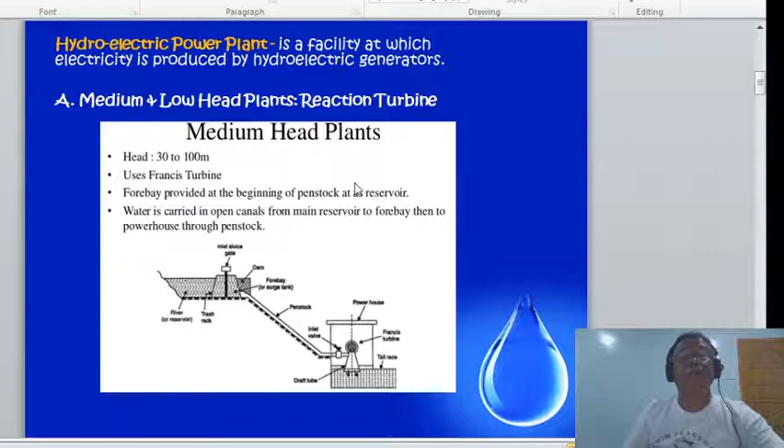Okay, so forebay provided at the beginning of penstock at the reservoir. Okay, so water is carried in open canals from main reservoir to forebay, then powerhouse through penstock. Okay, so here, class, is the illustration of the medium head plants. Okay,

so another, we have here the high head plants. So the turbine used for high head plants is the impulse turbine. Okay, so the head is from 100 meters to 2,000 meters. So water is stored in the lake over the mountain during high rainy season or when snow melts. Okay, so the turbine of course is the Pelton wheel. Okay, so this is the type of turbine that is utilized for high head plant.

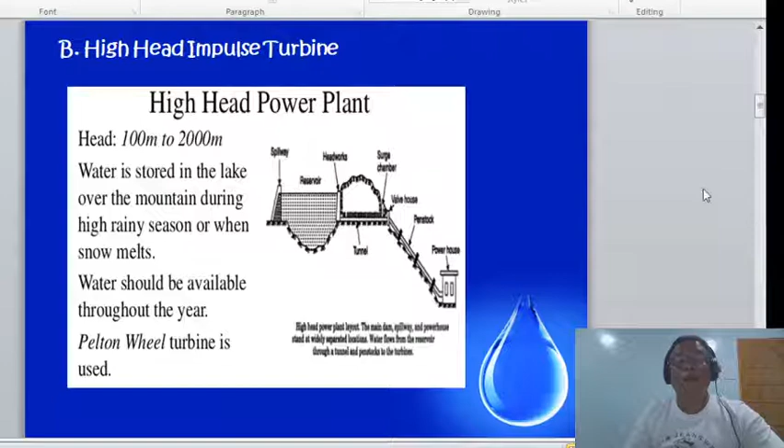Okay, so we have here some definitions of the hydroelectric power plant. One is of course the reservoir. Okay, so it stores the water coming from the upper river or water falls. Another is the headwater. So this is the water in the reservoir, the level of the water in the reservoir. Okay, spillway. So it is a weir in the reservoir which discharges excess water, so that the head of the plant will be maintained. Okay, another is the dam. So concrete structure that encloses the reservoir.

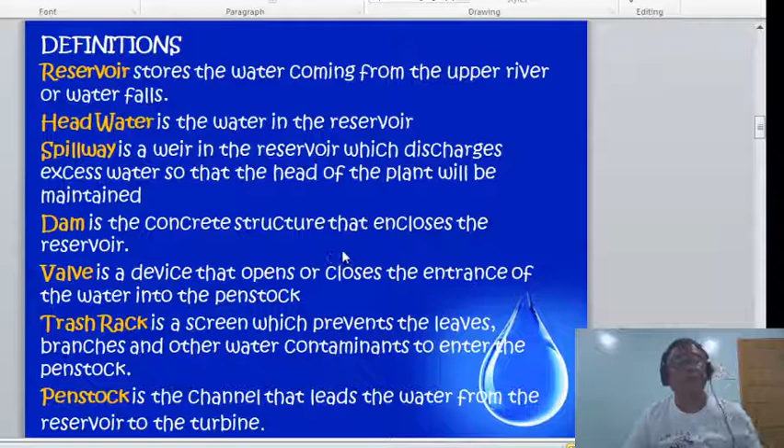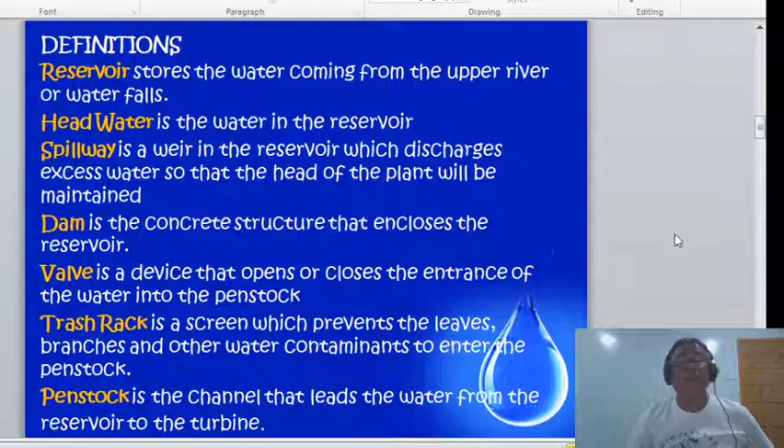Okay, valve. Okay, this is a device that opens and/or closes the entrance of the water into the penstock. Okay, another is trash rack. So it's a screen which prevents the leaves, branches, or other water contaminants to enter the penstock. So another is the penstock, of course, this is the channel that leads the water from the reservoir to the turbine. Okay, so take note, class, of the definitions.

Okay, so another, we have also surge chamber. Okay, so it's a standpipe connected to the atmosphere and attached to the penstock, so that the water will be at atmospheric pressure. Okay, we have generator, tail race. Okay, tail race is a channel which leads the water from the turbine to the tail water. Okay, and another is the draft tube. So a device that connects the turbine outlet to the tail water so that the turbine can be set above the tail water level. Okay,

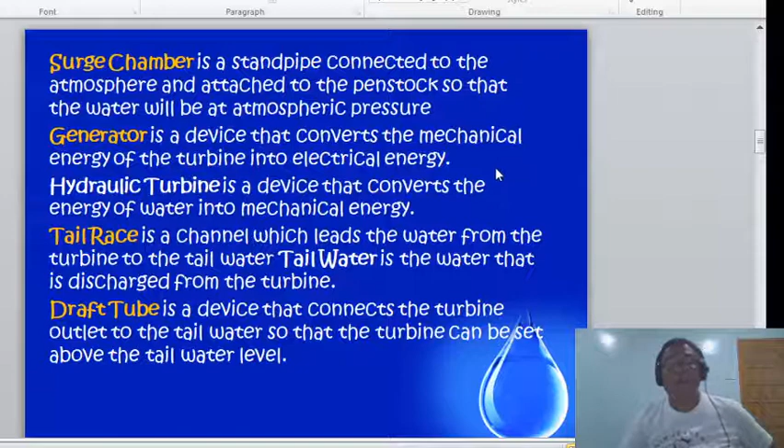so let us now go to the performance of hydroelectric power plants. Okay, so first we are going to determine what is a gross head. Okay, so gross head is the difference between the headwater and the tail water elevation. Okay, so HG is equal to headwater minus the tail water. Okay, so another, we have here the friction head loss. Okay, so we have here two formulas that can be useful in computing the friction head. Okay, so friction head loss is the head lost by the flow in a stream or conduit due to the frictional disturbances set up by the moving fluid and its containing conduit and by intermolecular friction.

Okay, so we have here the first is using the Darcy-Weisbach equation. Okay, wherein the formula is easy. So that is fLv² over 2gD. Okay? And another, we have the Morse equation. So, the formula is quite similar. Okay? So, in the Morse equation, the 2 is now at the numerator. Okay? From the denominator to the numerator. But take note, class, that when you use this equation, Morse equation, you have to use the friction constant, or f, from the Morse table. Okay? So take note of that, class. Okay?

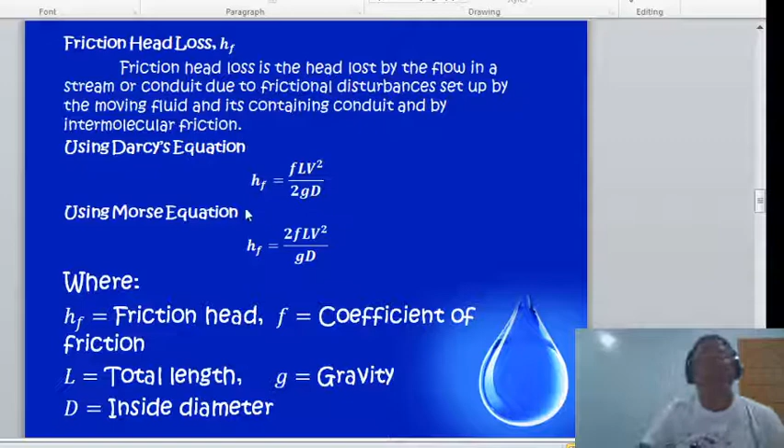So another is the net head. Okay? So the net head is, of course, the effective head, or is the difference between the gross head and the friction head loss. Okay? So the net head is gross minus HF. Another is the penstock efficiency. Okay, so we have here the net head divided by the gross head. Okay, so volume flow rate of water. So this is the product of the velocity and the cross-sectional area. Okay, so that is Q is equal to cross-sectional area of the conduit, or the penstock, multiplied by its velocity, is now your discharge.

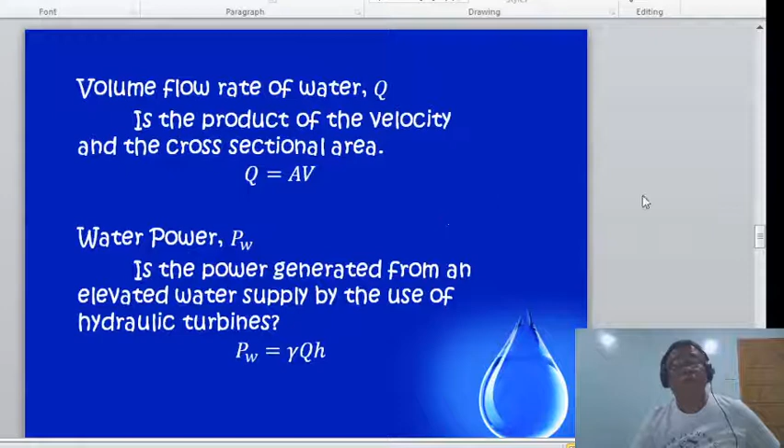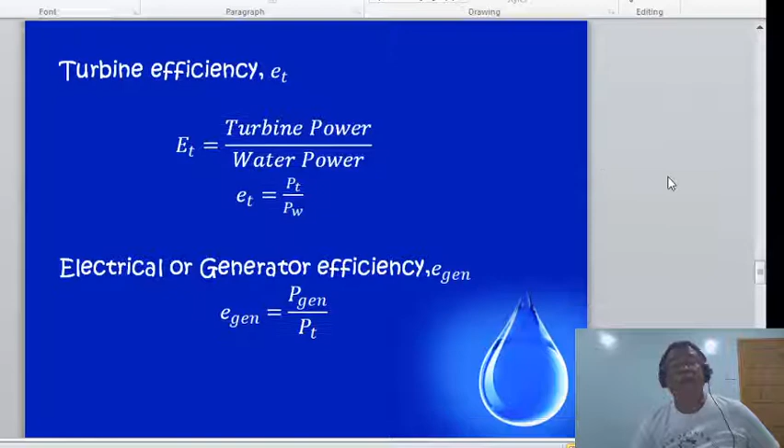Okay, another is the water power. So this is the power generated from an elevated water supply by the use of hydraulic turbine. Okay, so the power now is equal to the unit weight of the water multiplied by the discharge multiplied by the change in elevation. Okay, so another is the turbine efficiency. So the turbine efficiency, of course, is the turbine power divided by water power. Okay, electrical generator efficiency, generator power divided by the turbine power. Okay. Another, we have the synchronous speed. Okay, where n is equal to 120 f, the frequency, divided by the number of poles. Okay, and the hydraulic efficiency. So we have here the HW over the net head. Okay.

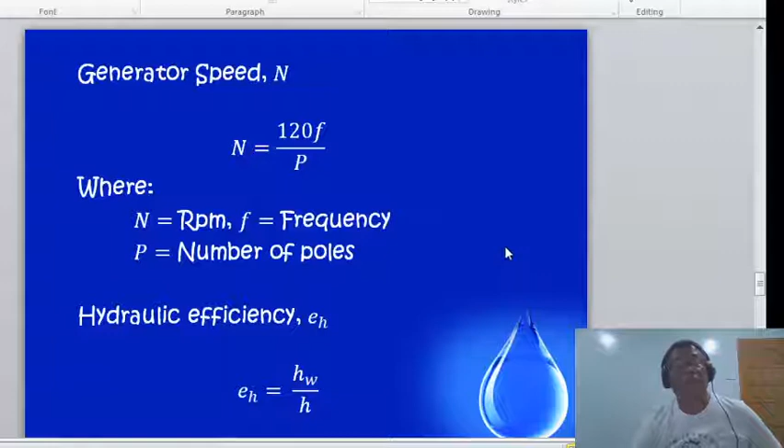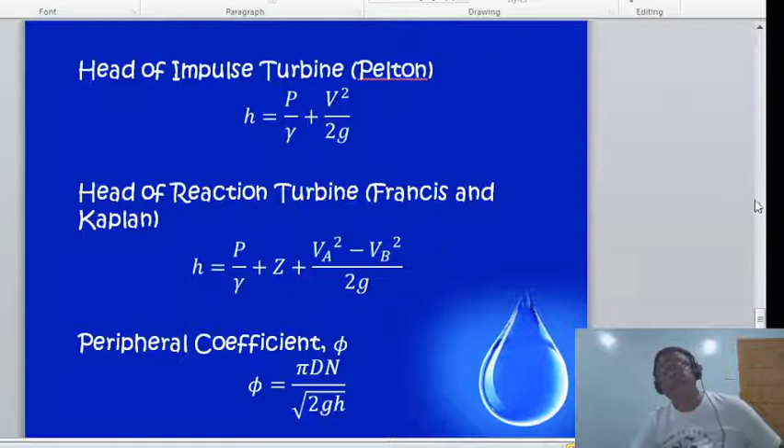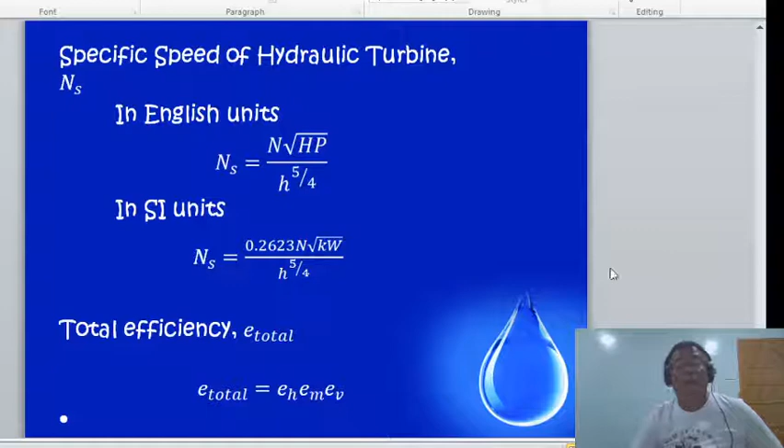so another, specific speed of hydraulic turbine. Okay, so in English, that is N square root of the horsepower divided by h raised to 5 over 4. Okay, so in SI, that is 0.2623 multiplied by N multiplied by the square root of the kilowatt, or the power, divided by h raised to 5 over 4. Okay, so for the total efficiency now, that is all the efficiencies multiplied: hydraulic efficiency, mechanical efficiency, and the volumetric efficiency. Okay, thank you very much, class. So that's all about the discussion of the principles used in the hydroelectric power plant.